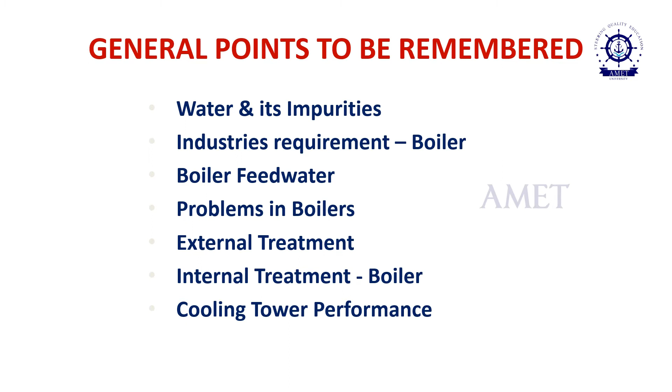One more topic we have to see is cooling tower performance. So cooling water also we are going to take. A little bit of soft water is required for cooling water purposes. The cooling water goes inside the coolant area and gets circulated. It sucks up the heat, and the hot water is taken into the cooler, that is the cooling tower. Then there is the delta T; we are observing 10 degrees centigrade, so that we are going to achieve. These are all the things we have to keep in mind for your excellence. Next.

In general, we take water from any nearby resources, like a river, a lake or a reservoir. The water we get from the resources cannot be utilized as usual in your operational process, so you have to treat it well. Accordingly, water is classified into two types: one is soft water and one is hard water.

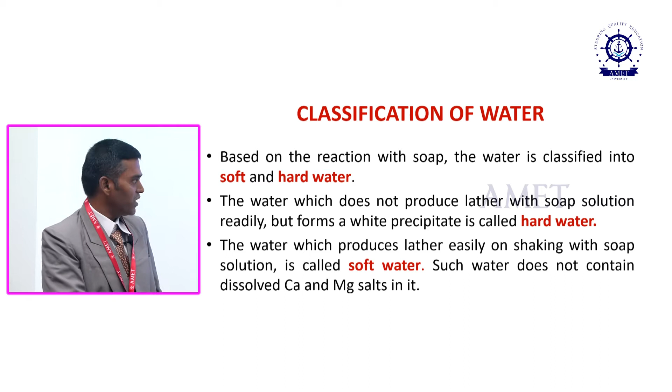What is soft water? Very simply, once it gives lather with the soap solution, or you feel comfortable using it for your regular applications, that is soft water. Hard water does not produce lather with soap solutions; it may give precipitation or scum with the soap solution or detergents. That is called hard water. What we are expecting is soft water, which is useful with no need for treatment, that we can use without doing any further operations. Next.

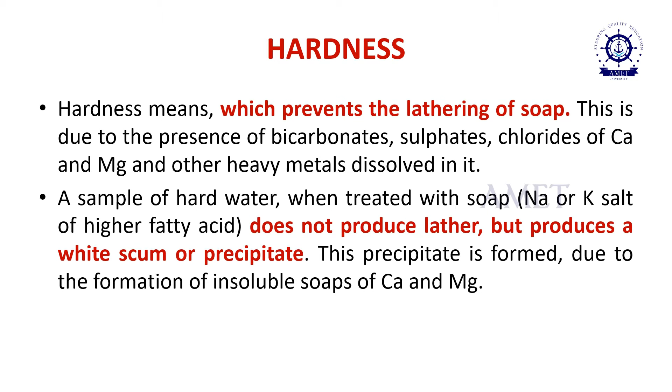There are various characteristics, determining parameters, which decide the water quality. The first and foremost quality is hardness. Hardness is a characteristic which decides whether water is suitable for any industry or for our drinking, potable purpose. Hardness is a quality which says what is actually present in the water, like what cations and anions are present in the water.

Cations means calcium 2+ and magnesium 2+, which are available in the water. In the case of anions, it is chloride, sulfate, carbonate, bicarbonate, likewise available in the water. So among the characteristics, hardness plays an important role, particularly in water chemistry. Next.

Hardness is divided into two types. The first one is temporary hardness and the other one is permanent hardness. Temporary hardness is due to the presence of carbonates and bicarbonates of calcium and magnesium. Permanent hardness is due to the presence of chlorides and sulfates of calcium and magnesium.

If water has temporary hardness, simple boiling will remove it. When it is heated, the bicarbonate material is converted into carbonate. The carbonate is in an undissolved form, which we can remove easily by a simple filtration process. Another way, we can do treatment like adding lime. If you add lime into hard water, it causes coagulation and carbonate formation takes place. That also we can easily remove.

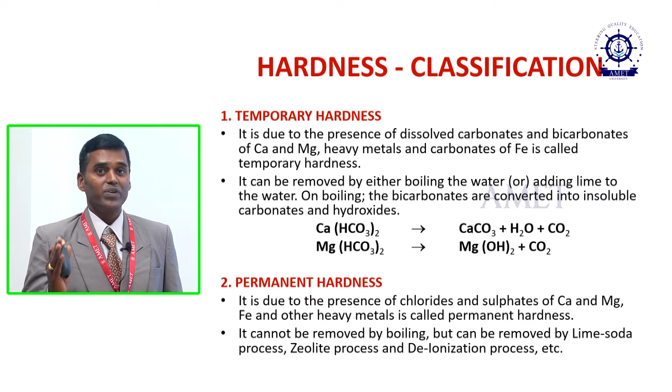In the case of permanent hardness, we have to remove it strictly with the recommended processes only. Various commercial processes are available: the zeolite process, permutit process, ion exchange process, reverse osmosis process. Such valuable, costly processes are available. Only by these are we able to eliminate calcium and magnesium along with their anions of sulfate and chloride.

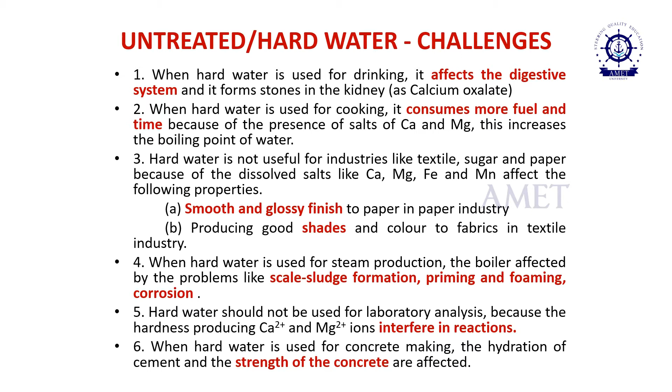Next slide. Okay, challenges. What are the challenges we are going to face in industries if we are using untreated water, particularly hard water, in the process, in the cooling tower or in the boiler? We have certain challenges in regular day-to-day life also. In day-to-day life, you are not going to get a proper lather. That is the problem. That means again water pollution takes place.

Second, in industries, there is the paper industry. When they make paper, the glossy or smooth surface we will not get with hard water. Another case is shading in fabrics, in textile industries. There is no proper shading, and that leads to unwanted patterns in the cloth structures.

Moreover, in industries, if you are using hard water, it forms scale. The scale reduces the heating efficiency. Ultimately, the heat conversion process is reduced, and it leads to wastage of fuel. So many problems are associated with hard water if you are not doing the treatment.

Boiler feed water. Why we talk about the boiler is that the boiler is very important for any industry. If you go to any industry, there is a low pressure boiler or a high pressure boiler. If it is operating at less than 13 megapascal, it is called a low pressure boiler. More than 13 megapascal, it is called a high pressure boiler. For a low pressure boiler, you can use soft water, no issues.

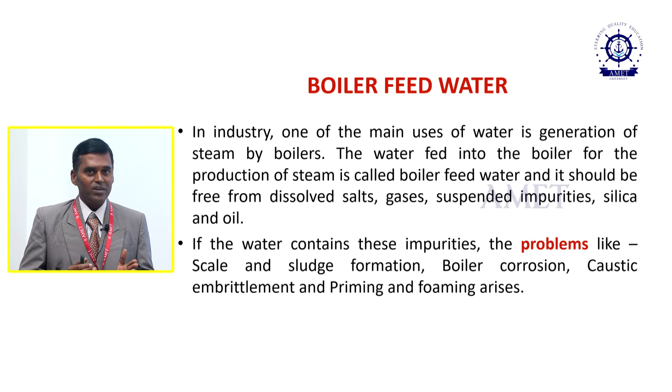Feed water essential requirements. The water feeding into the boiler is called feed water. In the feed water, we are expecting certain qualities. The first condition is that it is free from any ions. The second condition is that it is free from any dissolved gases. The third condition is that it should be free from turbidity. And the most important condition is that non-scaling... scaling substances should not be there.

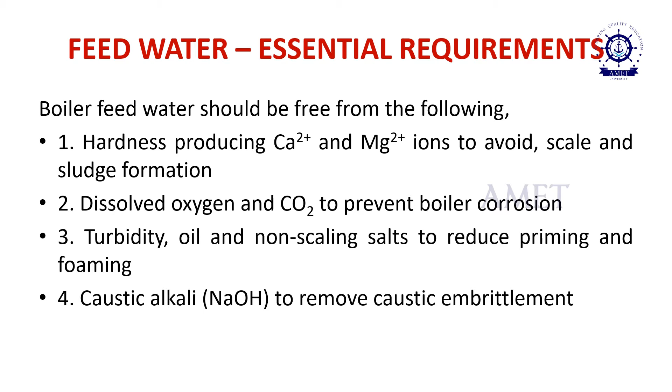And another thing is that we have to use caustic alkali to remove caustic embrittlement. So such conditions we have to follow in the case of feed water quality. The feed water quality can also be improved by adding ammonia into the media. At a higher temperature, ammonia evaporates with the steam. That is the main advantage. So if you maintain such a quality, your boiler is highly protected.

Scale and sludge problems. What is scale? Scale and sludge are like brothers. Sludge is a soft, loose form, like a precipitate. The media looks turbid. If you see the boiler through the boiler viewing glass, it shows something like a precipitate nature. That is sludge formation. Sludge formation is due to magnesium chloride, magnesium carbonate, magnesium sulfate, and calcium chloride.

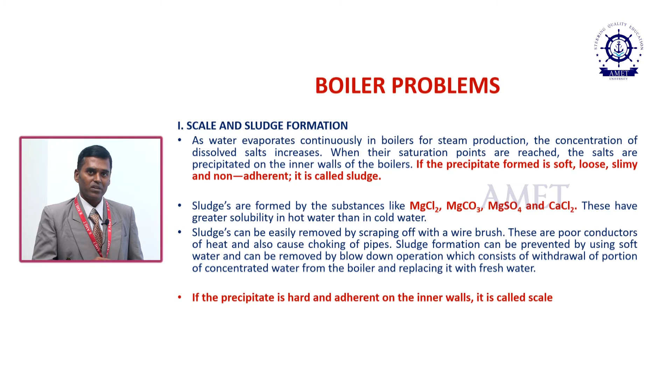If you are not solving the issue of sludge, it leads to the formation of scale. At high temperature, sludge is converted into scale. It is a strong layer coating the inner wall of the boiler. So scale and sludge are like brothers. We have to solve these issues thoroughly before entering into the boiler sections. We know very well that scale and sludge give a lot of problems.

The first problem is the wastage of fuel. Once there is formation of sludge and scale, there is wastage of fuel. As the scale thickness increases, like 0.325, 0.625, 1.25, 2.5 or 12 mm, with respect to that 12 mm thickness, the wastage of fuel is 150%. So you are going to lose a lot of fuel in this case.

The next thing is the decrease in efficiency. We have various valves and condensers in the boilers. Once these deposits get into the boilers, they lead to something like valve choking that ultimately reduces the efficiency of the boilers. Your boiler efficiency reduces, and it reduces the life of the boiler also.

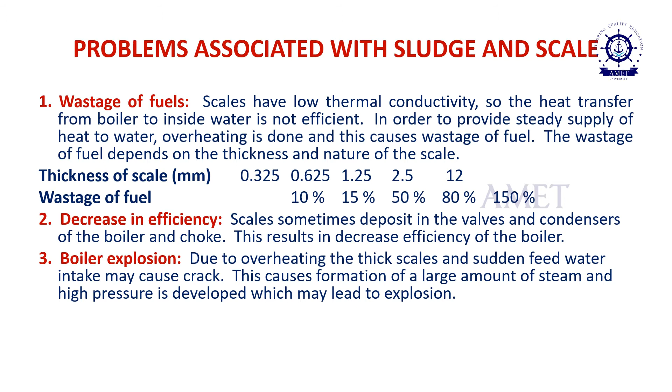The third thing is boiler explosion. We have heard about boiler explosions many times. Because of these water-related problems, sometimes the online monitoring device will not show the correct presence of water level in the PCR, that is the control room. So if you suddenly take water into the boiler without knowing the quantity inside, at high temperature, the boiler may burst or explode. Scaling causes cracks, and ultimately improper readings in the monitoring device, which leads to the explosion of the boiler.

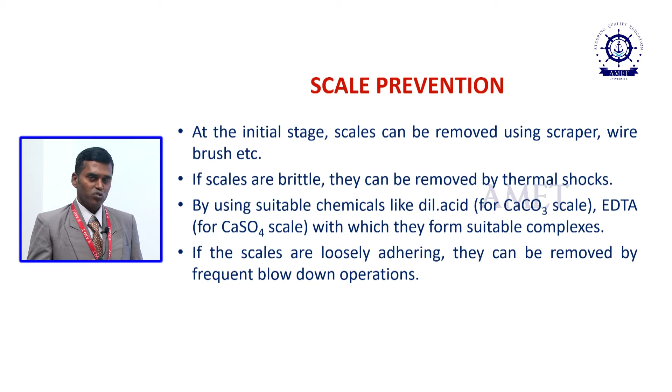Scale can be prevented by various methods. If it is at a very normal level, scales can be removed by a simple process or by adding suitable chemicals, like dilute acid or EDTA. These are the chemicals we can add to solve simple issues. Once the issues get to a higher level, we have to use a hammer or other removal technologies to remove scale or sludge from the boilers.

The next problem associated with the boiler is boiler corrosion. Corrosion is an unwanted destructive phenomenon.

Corrosion is due to the presence of not only ions but also because of the dissolved gases. We can control the corrosion caused by dissolved gases by various methods.

To control the gases, we can use mechanical deaeration or chemical scavenging method. In chemical scavenging, sodium sulfite is a material which scavenges the oxygen and is converted into sodium sulfate, which can be removed by boiler blowdown.

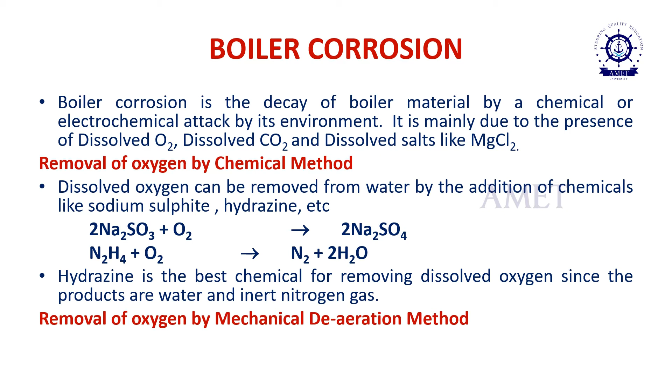In case of hydrazine, it is a powerful material currently used in the industries, which absorbs oxygen and converts it into nitrogen and water. The nitrogen evaporates with the water stream, no problem, it mixes with the environment with no environmental issues. So we can use both chemicals, and altogether we can also use mechanical deaeration.

Mechanical deaeration means it operates at high temperature with perforated plates. Water is sprinkled onto the perforated plates, so whatever dissolved gases are present get degasified by the degasifying unit and removed, and ultimately we get gas-free water.

The gas-free water means there is no corrosion, because we already have treated water. Next issue, caustic embrittlement. This means if you have an additional quantity of hydroxide ions by the addition of sodium hydroxide or from any other sources, the hydroxide ion concentration increases, showing caustic alkalinity. The caustic alkalinity is also one type of corrosion.

If you are not controlling this, it also leads to boiler problems. How can we control caustic embrittlement? By using sodium sulfate as softening agent instead of sodium carbonate. Most treatment technologies follow sodium carbonate, but we have to avoid sodium carbonate and use sodium sulfate instead.

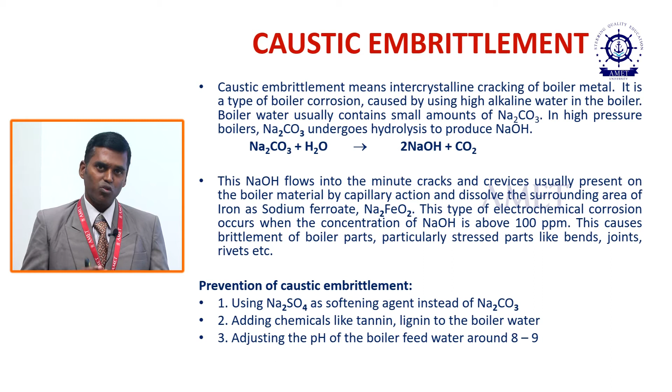Another method is adding chemicals like tannin or lignin to the boiler water, which prevents caustic embrittlement. Third, you have to adjust the pH between 8 to 9 using ammonia, so that ammonia and hydrazine are mixed together and dosed into the feed water line. Then also we are able to see there is no caustic embrittlement.

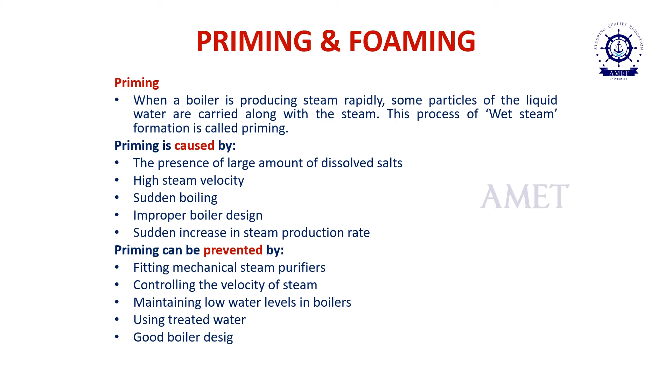The next minor but important issue is priming. Priming is otherwise called wet steam. What is that? When steam production takes place, some of the moisture also goes with the steam, which means the steam temperature reduces.

Once the steam temperature reduces, you will not get proper turbine output, which leads to decreased efficiency in industrial processes. Priming is mainly caused by the amount of dissolved salts or high steam velocity, sudden boiling, improper boiler design, or sudden increase in steam production rate, all of which cause priming in boilers.

How can we avoid this? By having proper fitting in the mechanical devices. Second, controlling the velocity of steam - the steam velocity should be in perfect form with no deviation.

Third, maintaining water quality and correct quantity of water level. There should be about 70% water level maintained in the boiler. Next, using treated water, and altogether having a good boiler design, which is very important in case of priming.

In the case of foaming, it takes place on the surface of the water layer. Foaming is caused by the presence of air ingression, or due to the presence of grease, or due to the presence of oil material.

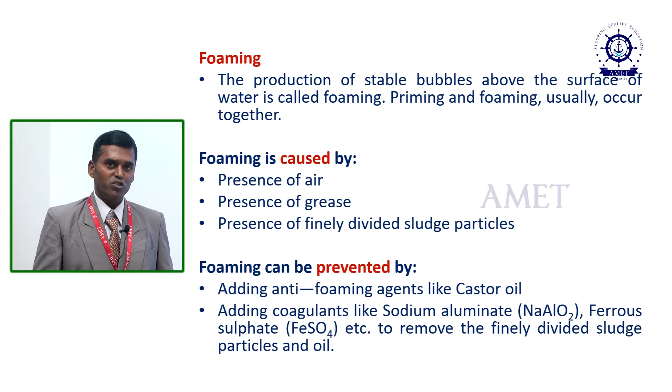If one small quantity, one drop, is present in the boiler water, it makes a lot of foaming. This foaming leads to reduction of steam production, which can be controlled by adding anti-foaming agents like castor oil. We can also add coagulating agents such as sodium aluminate and ferrous sulfate, which all remove foaming agents, ensuring there is no foam formation.

The clariflocculator is also called the stirring chamber. In the clariflocculator we add some flocculating agents, and after the clariflocculation process is over, the water is taken into the storage tank, where it is stored for a day. After that, it is pumped into the gravity filter. There are two types of gravity filters: horizontal sand filter, vertical sand filter, or activated carbon filter. Gravity filtration filters out whatever suspended or floating material is present.

Then the water goes into the storage tank. From the storage tank, it may be supplied for drinking water purposes or go into the cooling water process. Part of the water is taken into the DM plant, the demineralization plant. After treatment there, it goes to the boiler makeup, which is nothing but feed water. Another portion from the storage tank goes into the softening plant.

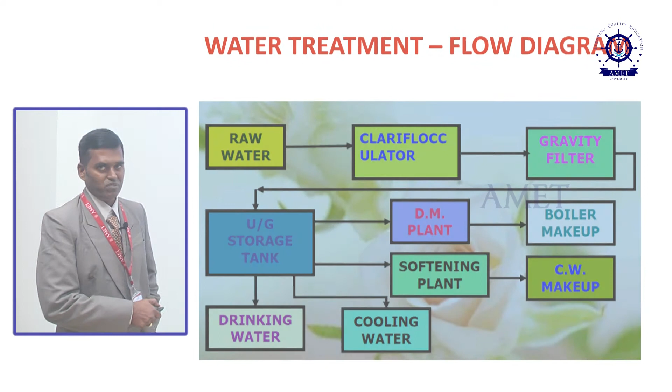This is specifically about the clariflocculator. In the clariflocculator, which is a flash mixing tank, we add chlorine, alum, lime, and everything is dosed into this clariflocculation tank. The clariflocculator operates rotating 360 degrees, mixing all the material together. This leads to formation of flakes, which settle down at the bottom of the clariflocculator and are removed via the bottom area.

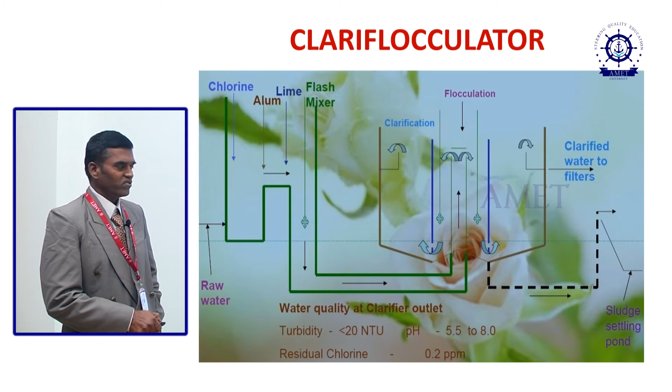This overflow water then enters the next device, the clarified water storage tank. In terms of water quality, if the inlet water turbidity is more than 20 nephelometric turbidity units, it is reduced to less than 20 NTU, and pH is maintained between 5.5 and 8. Residual chlorine is expected to be 0.2 ppm, which is very important to control bacterial contamination. The sludge collected from the bottom is taken into the activated sludge process, and part of the sludge is taken back into the clariflocculator.

For backwashing the gravity sand filter, water is passed through the filter in the reverse direction. When passed in reverse, whatever accumulated sludge or suspended material is present gets removed via the outlet pipeline.

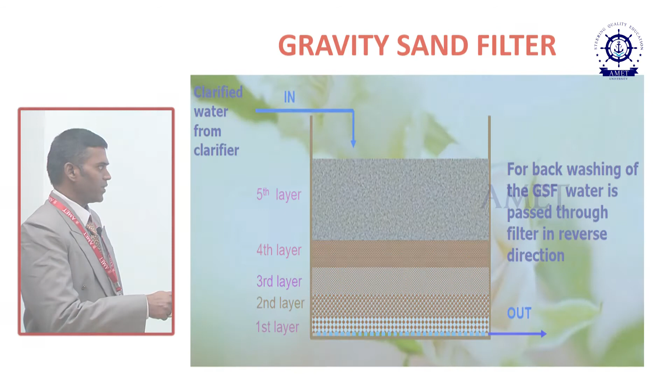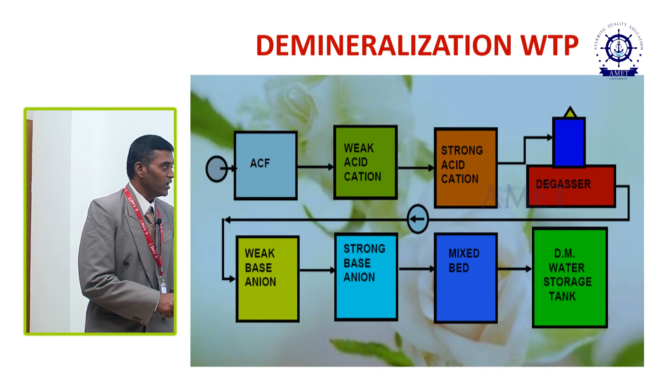Now we are expecting the water quality to be of higher quality. It is finely polished water, or we can say high purity, ultra pure water.

Okay, boiler. You see the boiler, that's very important. I told you many times, I represented this. So for the boiler, if you are not doing the proper treatment, it will be in a dangerous condition. But still we have the time, we can take care of the boilers. The first thing is that this is a boiler.

External conditioning - I told you in general many methods are there, activated carbon filter, everything is there. So one of the techniques is this: reverse osmosis.

Reverse osmosis is mainly used where there is saline water as the only source, salt water. More than 20,000 TDS, 20,000 ppm of TDS, if present, that is saline water, with a high level of ppm of sodium.

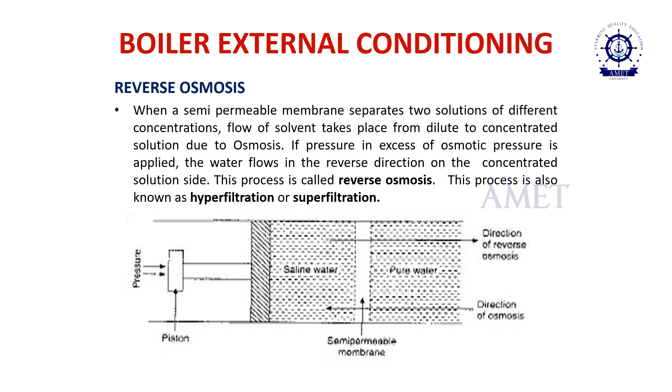In such a situation, reverse osmosis is used. Reverse osmosis is a simple process, but we have to take care about this. Like here, this is a semi-permeable membrane. Through the semi-permeable membrane, saline water enters into this membrane, and we get pure water by operating with some external pressure forces.

This external pressure, when we apply it so the saline water passes into the pure water media, that is called the direction of reverse osmosis. If you see the reverse direction, that is the direction of osmosis.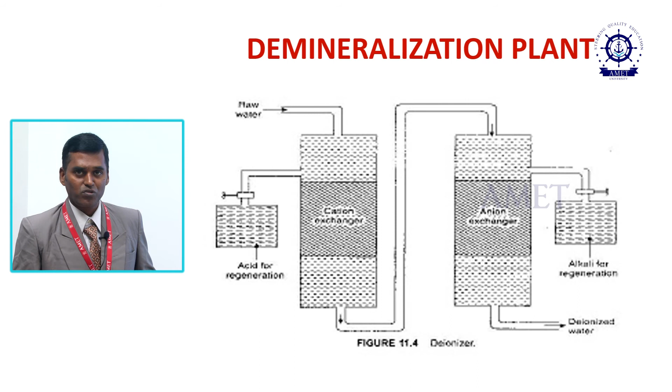Once the units get exhausted, they should be regenerated. Strong acid cation is regenerated with the help of strong acids, like HCl, sulfuric acid. The strong base anion unit, when exhausted, we have to regenerate with the help of base, sodium hydroxide. So we can do regeneration in this process, and we can use it again and again, but this has some challenges. The challenge is that this also gives some wastewater, that has to be taken care of as well.

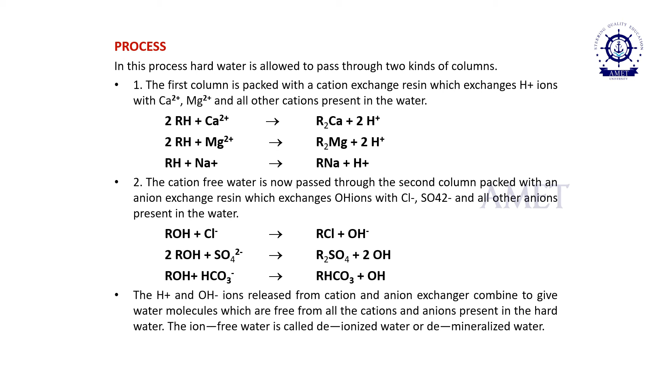In the first column, calcium is removed and we are getting H plus. Magnesium is removed, we are getting H plus. If there is sodium present, we are getting H plus. In the second column of strong base anions, we are able to get all OH minus ions. H plus and OH minus ions mix together and form pure water.

Regeneration can be performed with HCl for strong acid cations. Whatever calcium is removed as calcium chloride, magnesium chloride, sodium chloride, we get RH, that is regenerated. Similarly, the anionic bed is also regenerated as ROH. So we are able to regenerate again and again, and use this unit again and again.

It has lots of advantages. It is able to produce hardness less than 2 ppm, and water of whatever quality, highly acidic media or alkaline media, we can treat very well in this process. Compared to the earlier method, this method has certain disadvantages: it is a costly process, expensive chemicals are used, and highly turbid water cannot be softened. Turbidity we have to take care of. If water of more than 10 ppm enters this unit, it will choke the unit completely.

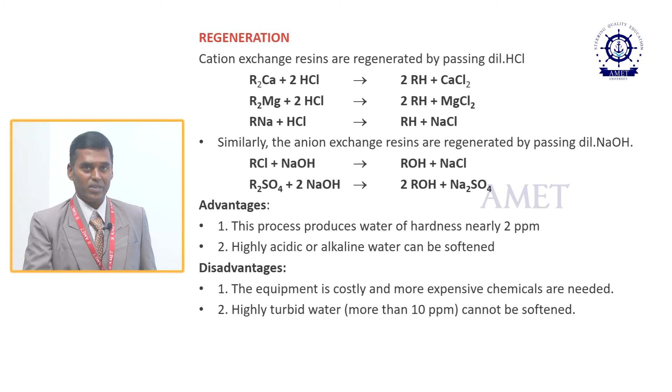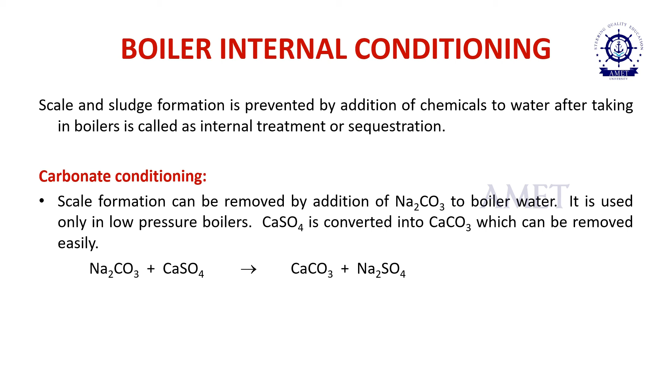This is another solution for these boiler problems. I talked about external treatment; this is internal treatment. For internal treatment, various treatment technologies are available. One of them is carbonate conditioning. In carbonate conditioning, sodium carbonate is used, and calcium sulfate in the water is converted into calcium carbonate. Calcium carbonate is an insoluble material which can be removed by boiler blowdown. The main advantage of carbonate conditioning is that it is used in low pressure boilers.

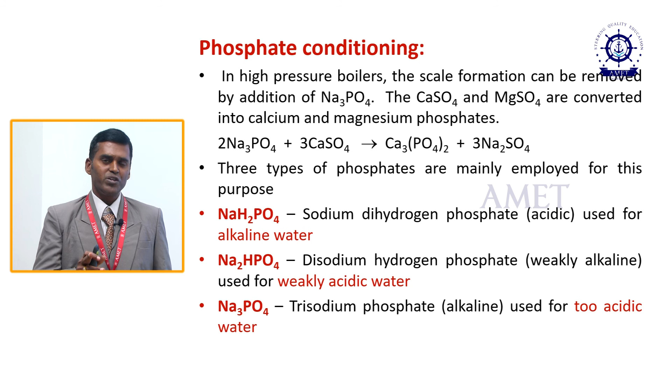Phosphate conditioning is mainly used in high pressure boilers, which produce huge tons of steam. High pressure boilers are mainly treated with phosphate. There are three phosphates: monosodium phosphate, disodium phosphate, and trisodium phosphate. Monosodium phosphate is acidic and is used for highly alkaline water. Disodium phosphate is weakly alkaline. Trisodium phosphate is mainly used for too acidic water. Phosphate conditioning is currently used in most industries.

The third one is Calgon conditioning. Calgon is nothing but sodium hexametaphosphate. Sodium hexametaphosphate takes care of whatever calcium sulfate is left over from the external treatment. It is converted into an insoluble material that is also removed by boiler blowdown.

Another operation is colloidal conditioning. We add colloidal conditioning agents that cause colloid formation inside the boilers. By boiler blowdown operations, we are able to remove that from the boilers as well. So ultimately, our boiler is free from the problems of sludge, scale, caustic embrittlement, corrosion, priming, and foaming.

So in this session, we elaborately discussed what water is, its importance, why we should take care of water, the water chemistry involved in treatment, why we should do the treatment, how to save our boilers, and how to save our nation's economy. All these things we discussed in this session.